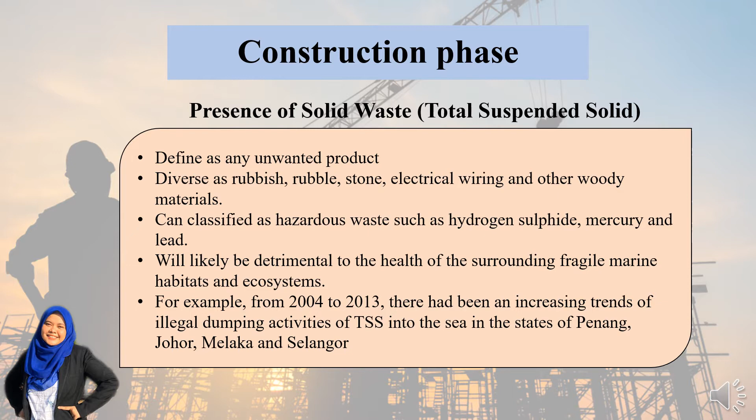For example, from 2004 to 2013, there had been an increasing trend of illegal dumping activity of TSS into the sea in the states of Penang, Johor, Melaka and Selangor.

The second type is bottom water contamination, which can occur from construction activity as well as non-routine events. Destruction and disposal of waste can change the current pattern and cause water stagnation due to uncontrolled release of refuse and rubbish such as packaging and construction materials.

Chemical contaminants found in diesel, oils and other toxic chemicals caused by construction activity can also pollute the adjacent body of water in a number of ways, such as through drains or runoff directly into rivers or lakes. This will cause the water quality to deteriorate and become poisonous for marine habitat to survive.

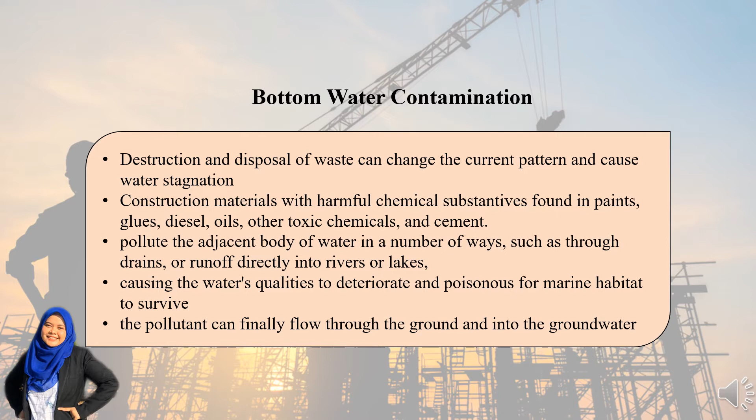Next is sedimentation. Sediments are commonly composed of loose sand, clay, and other soil particles that inhabit bodies of water. Sedimentation normally occurs during construction operations involving removal or disposal of soils and sand that have been transported by water. Within a few hours, a small construction site can generate enough sediment load to pollute the entire sea due to its close proximity to the sea.

Some of the environmental effects of sedimentation include loss of coral reef, human health impacts, decreased fishery resources, and shoreline change.

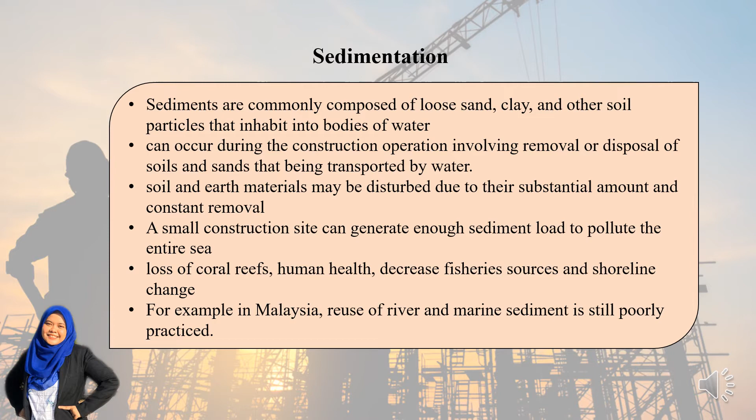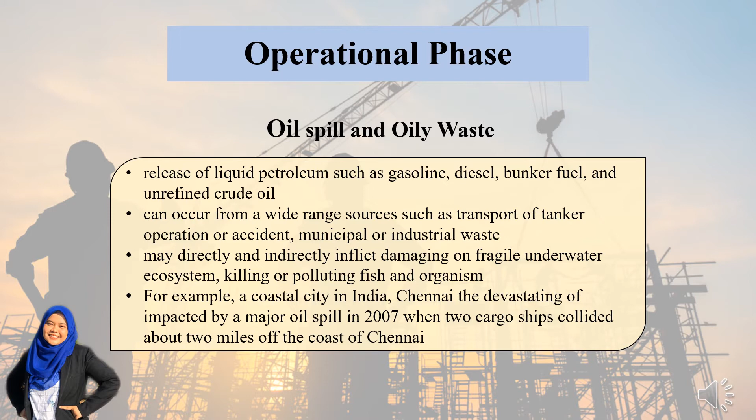Next, we move to the operational phase. The first potential pollution that may lead to marine pollution is oil spill and oily waste. An oil spill is the release of liquid petroleum such as gasoline, diesel, bunker fuel, and unrefined crude oil. Oil spill waste can occur from a wide range of sources such as tanker transport operations or accidents, municipal or industrial waste, and land-based oily discharge, all causing oil pollution in the marine environment. Oil spill and oily waste may directly and indirectly disrupt fragile underwater ecosystems. For example, Chennai, a coastal city in India, was devastated by a major oil spill in 2007, which occurred when two cargo ships collided about 2 miles off the coast.

Next, during the operational phase of the project, there is possible pollution from higher presence of heavy metals. The term heavy metal refers to metallic chemical elements with relatively high density and toxicity. Heavy metals can enter a water supply through operational phases of industrial activity and even from mine drainage. Some heavy metals are highly toxic, such as iron, magnesium, lead, and mercury, which are toxic even in small amounts and harmful to aquatic sediments. In Malaysia, heavy metal sludge was one of the main wastes produced. For example, the National Water Quality Standard in Malaysia recorded that iron metal was the dominant metal in Selangor River in 2017 due to continuous increase in industrial activity.

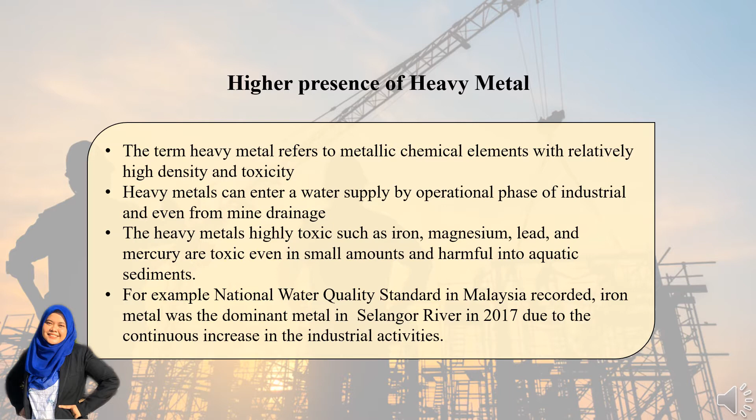Lastly is unused and waste material pollution. This waste comes from chemicals used in the operation phase such as maintenance and chemical waste, sludge, and domestic waste, including maintenance of equipment such as fuel, oil, lubricant, and cleaning fluids. All these unused materials may contain lead, asbestos, or other hazardous substances, and will cause adjacent coastal and inshore waters to be detrimental to the health of surrounding fragile marine habitats and ecosystems, especially where the project is located near the sea. For example, in 2010 in the Citarum River, West Java, Indonesia, textile manufacturers such as Zara, Adidas, and H&M allowed industry to discharge toxic waste through processes such as textile bleaching and coloring.

So that's all from me. I will pass to Asma as the next presenter.

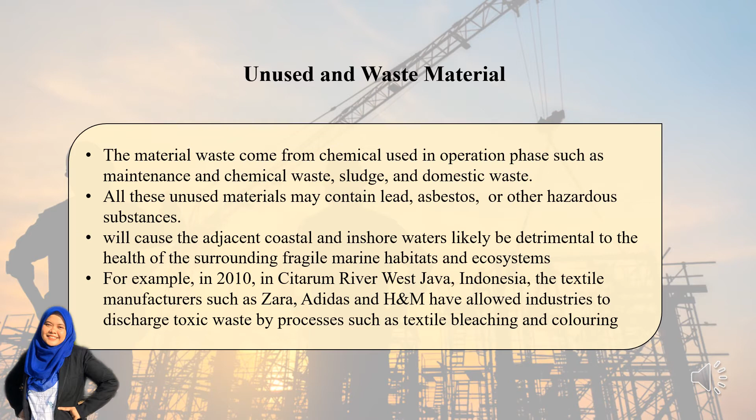So now I will continue with the International Legal and Normative Framework for Marine Pollution Prevention. Firstly, the United Nations Convention on the Law of the Sea, LOSC. Under the LOSC, it describes the rights and obligations of nations with respect to their use of the world's seas, and sets out rules for cooperation, the environment, and the management of marine natural resources. LOSC is an important convention that established international rules to prevent, reduce, and control pollution of the marine environment, with numerous articles mentioning land-based and vessel-based pollution.

The articles that relate to the project are Article 207, pollution from land-based sources; Article 209, pollution from activities in the area; Article 210, pollution by dumping; and Article 211, pollution from vessels.

Next, the International Convention for the Prevention of Pollution from Ships, MARPOL. MARPOL is the main international convention covering prevention of pollution of the marine environment by ships from operational or accidental causes. The convention includes regulations aimed at preventing and minimizing pollution from ships.

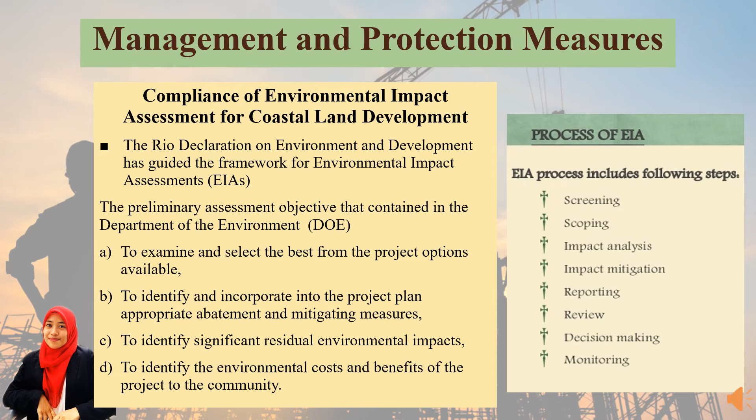So there are a few processes of the EIA, which is screening, scoping, impact analysis, impact mitigation, reporting, review, decision making, and monitoring. Next, installation of oily waste reception center.

IMO has recognized the provision of reception facilities is important for effective MARPOL implementation, and the Marine Environment Protection Committee has strongly encouraged member states to fulfill their treaty obligation on providing adequate reception facilities.

Building water and sewage treatment plant. Unsafe management and disposal of ship waste can readily lead to adverse health consequences. Humans can become exposed directly both on ship and at port as a result of contact with the waste, which is not being managed in a safe manner.

Exposure also can happen via environmental transfer due to unsafe disposal. Sewage treatment plants are constructed to transform raw sewage into an easier manageable waste and to reuse the treated sewage water.

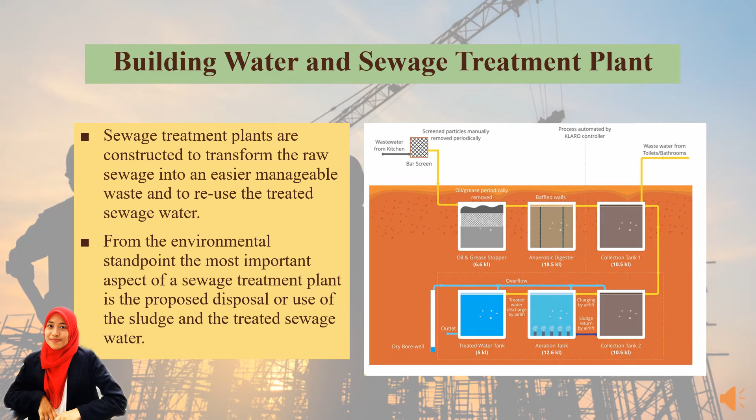Thank you, Asma. Next, I will present about the National Legislative Framework for Marine Environmental Pollution Control.

In this part, it is divided into three: federal law, state law, and municipal law. Under federal law, we use the Malaysian Environmental Quality Act 1974. It is the most comprehensive piece of legislation to deal with environmental protection and pollution control. We look to section 27 and 29 of this article, which CMFILP needs to comply with.

Second, we look into the Merchant Shipping Ordinance 1952. This is a Malaysian legislation that deals with marine pollution and specifically vessel-based pollution. This act was the oldest law that was introduced to address merchant shipping matters. We look into section 49(1B)(1)(K), which states about ship-to-ship activity. This is because CMFILP needs to follow this federal law as a guideline before they start their construction.

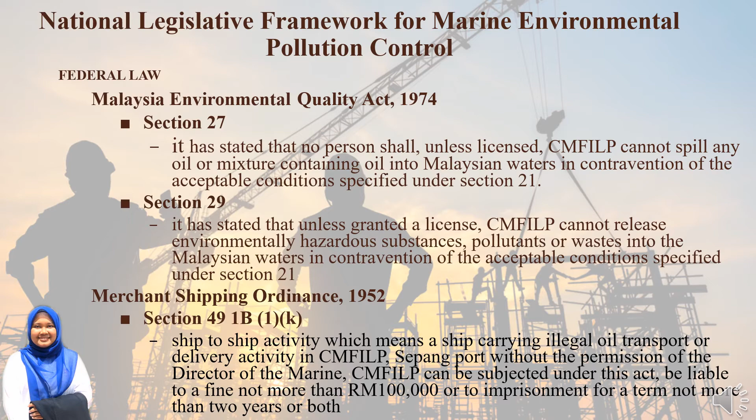Next, we go through the state and municipal law. Under state law, there is the Selangor Water Management Authority Act enactment, which shall apply to all rivers within the state of Selangor. This enactment contains 14 parts with 130 sections.

We look to section 41 to section 45. Then we look into section 47, which states that the authority may advise CMFILP management to develop on any land. Lastly, we look into section 78(4), which states the penalty if CMFILP breaks the rules and regulations.

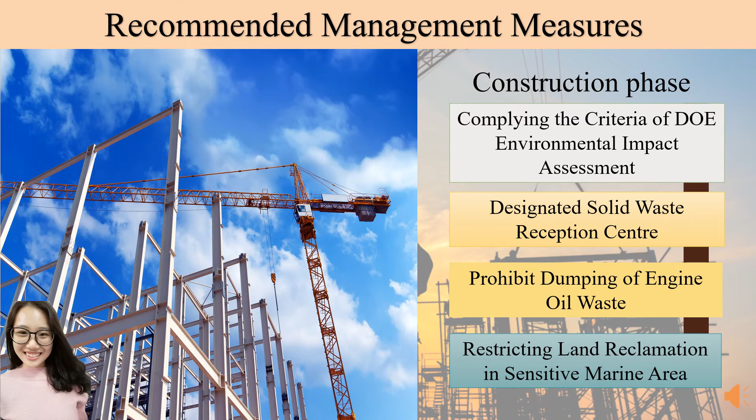In the construction phase, we have four elements. First, complying with the criteria of the DOE environmental impact assessment. Second, designated solid waste reception center. Third, prohibit dumping of engine oil waste. And the fourth will be restricting land reclamation in sensitive marine areas.

The CMFILP is recommended to comply with the criteria of the DOE environmental impact assessment. The contractor is responsible for providing information on the environmental impact caused by the project. For example, the EIA has been used in the European Commission as the EIA directive, which applies to a wide range of defined public and private projects.

Second, during the construction phase, the CMFILP is also recommended to establish a designated solid waste reception center. We can see based on data from the OECD in 2008, that the amount of waste generated by sector shows municipal waste and construction waste were the highest among all types of waste.

Designated solid waste reception center is also a standard applied in the European Union Waste Directive. The Waste Framework Directive sets out basic requirements for member states handling waste: prohibit uncontrolled disposal of waste, establish an integrated and effective network of waste disposal plants, prepare waste management plans, ensure those who store waste handle it properly, and ensure waste treatment operations are licensed.

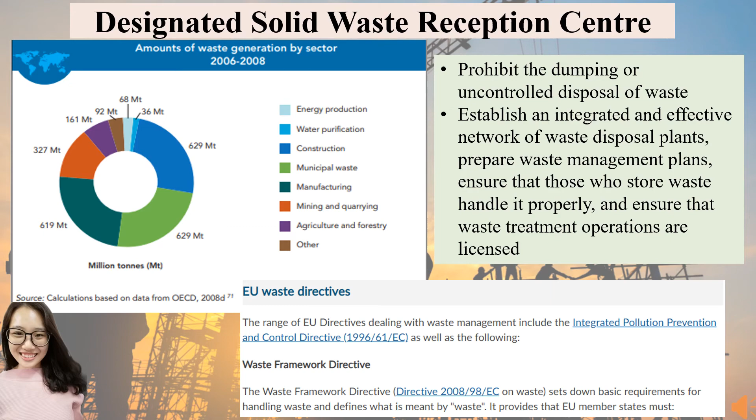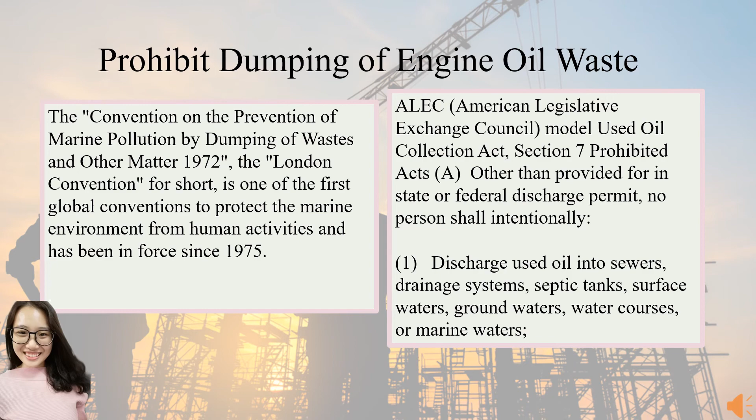The park should also be prohibited from carrying out any illegal dumping of engine oil waste into the territorial sea and internal waters. This is a standard restated in the London Convention, aimed at protecting the marine environment from human activity. For example, this prohibition is reflected in the ALEC model Used Oil Collection Act, which prohibits the discharge of used oil into the drainage system.

During the construction phase, the CMFILP is also restricted from carrying out land reclamation in sensitive marine areas. Sensitive marine areas or environment sensitive zones are places that have special attribution to the environment and should be carefully managed by the state.

We can see this in the European Union's 7th Environment Action Programme, aimed at ensuring that by 2020 the land is managed sustainably. Also in India, the Coastal Regulation Zone has rules to govern human and industrial activity close to the coastline in order to protect the fragile ecosystem near the sea.

In the operational phase, the construction company is required to install oily waste reception facilities at the port. This is recognized by the IMO towards the implementation of MARPOL, stating that member states are encouraged to fulfill their treaty obligation to provide waste reception facilities for ship-generated waste.

For example, Australia, as a member of the MARPOL convention, has ensured that facilities are adequate in the ports to carry out normal operations for ships.

The park should also install waste traps at the construction site and industrial facilities. For example, the silt fence is a stormwater management practice used by the United States under the U.S. Clean Water Act. This practice keeps soil on a construction site rather than letting it be washed off into natural water bodies and cause sedimentation.

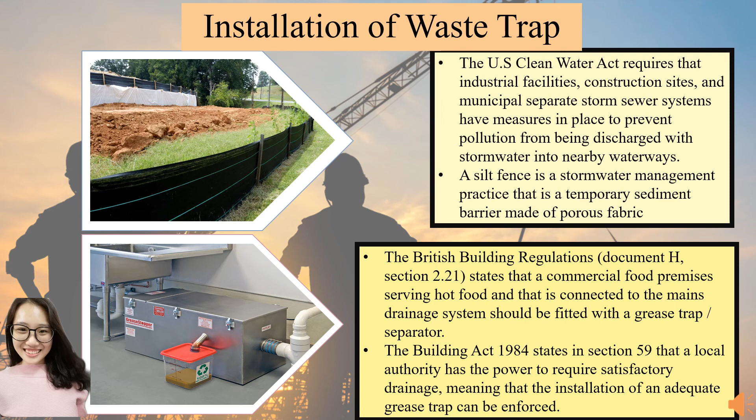Furthermore, the park should also provide water and sewage treatment plants. This facility is used to remove contaminants and produce treated wastewater that is safe enough for release into the environment.

Annex 4 of MARPOL provides a set of regulations to prevent pollution by sewage. For example, in Queensland, Australia, operators are licensed under the Environmental Protection Act 1994 to discharge treated wastewater at an acceptable environmental standard into the waterways.

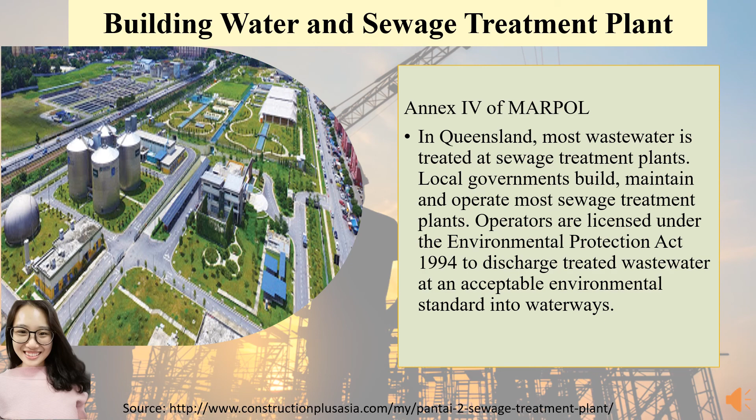CMFILP is suggested to promote recycling programs during the operation phase. One approach that can be taken by the Friendship Park is to participate in a program to recycle used engine oil. Recycling and reusing used motor oil is preferable to disposal and can provide great environmental benefits.

For instance, the Australian government has supported the recycling of used engine oil by introducing the Product Stewardship for Oil Scheme. This project is aimed at encouraging environmentally sustainable management and re-refining of used oil and its reuse.

In conclusion, the China-Malaysia Friendship Industry Park needs to be aware of the potential marine environment pollution caused by project activities. The park should refer to the norms, principles, and rules of international conventions to prevent land-based and vessel-based sources of pollution in the internal waters and territorial sea.

The park needs to also follow the national laws and regulations currently adopted by the Malaysian government to minimize marine pollution. Most importantly, the CMFILP should also comply with the recommended management measures during the construction and operational phases to prevent marine pollution from occurring.